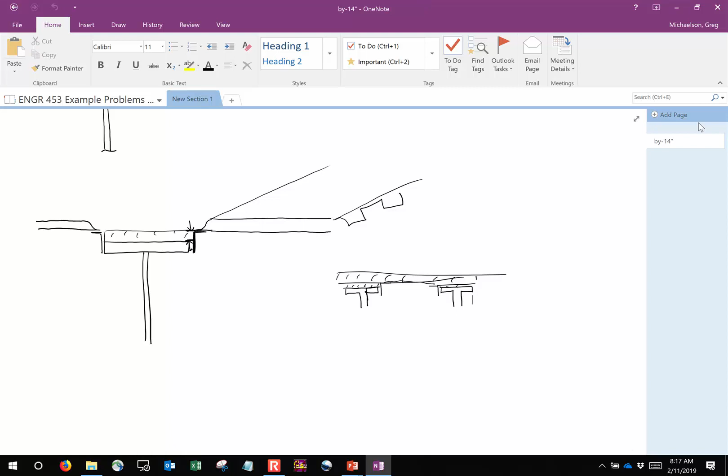Let me show you something. The easiest way to do this is to just draw it, okay? Let's say, for the sake of discussion, actually, let's do this on the page.

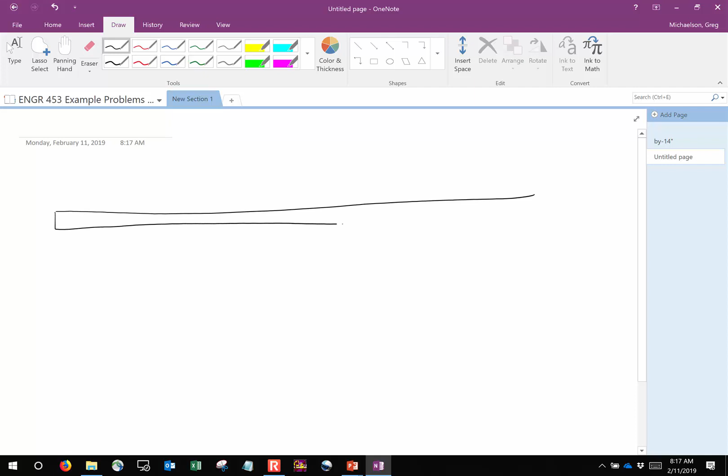Let's say, for the sake of discussion, that I had a two-span bridge, okay? So I've got a bridge that goes like this, and I have an abutment, and I've got a pier right there, okay? Now let's put some numbers on this. Let's say that this span is 100 feet, and this span is 100 feet. I'm going to tell you right now, there is no way that's coming in a single piece.

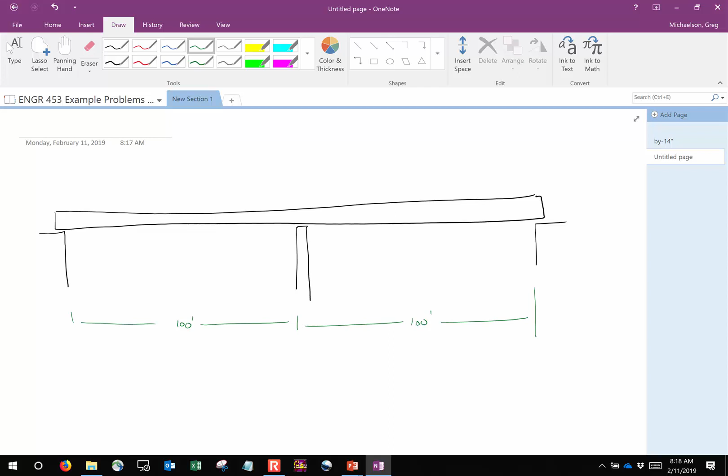No way, okay? So the question is, where do you put a splice? Now, let's say, for the sake of discussion, that I'm going to have 3 pieces. If you were to tell me that you think it's a good idea to put a splice right there, I'm going to ask you to stick your hand out.

That point right there is the absolute worst place ever to put a splice, because at that particular point, you have literally the highest shears and the highest moments. Worst place ever. In fact, in design mode, a lot of attention's got to be placed right there because there's a lot going on, okay?

So the question is, where do you place the splice? I propose that you place the splice about right here and about right here, where this distance is something like 20 feet. About 20 feet. And you're like, where the hell did you come up with that? Are you just making stuff up? No, I'm not making stuff up. Let me show you. Here's why.

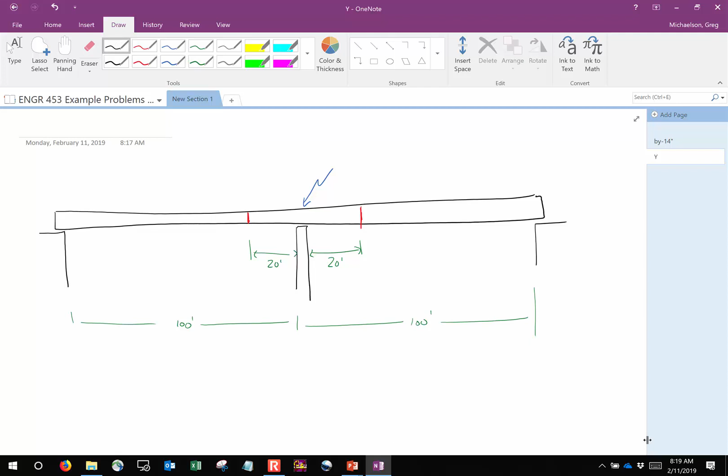Okay, if you look at a beam that's like this, pop quiz: what's the deal? Determinate, indeterminate, what's the deal? Remember? You have 1, 2, 3, 4 reactions, and 3 equations of equilibrium.

Oh, you're looking at me cloudy. See this? This is my heart breaking right here. No, it's not Mortal Kombat or something.

All right, here's the reason why I picked those points. If you look at the moment diagram for a section that looks like that, what happens is you end up getting like a little bit of a smiley face, then a frowny face, then a smiley face. And so where you want to put the splice is right there, where there's no moment, okay?

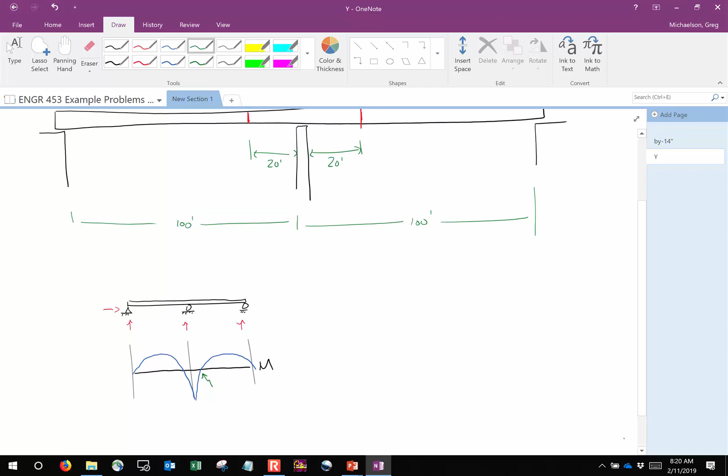Now, are you going to get zero shear there? No, that's not going to happen. If you look at the shear diagram, it looks something like this: it goes up, it goes down, it goes up, it goes down, and it goes back up. So you are going to get some shear there, it's unavoidable. But you're going to get a lot less bending moment. So in this instance, you would put your splice where there's no bending moment, or you do your best to, okay?

All right, in a simply supported bridge, however, that's impossible—you can't do that. Because in a simply supported bridge, here's your moment diagram, it looks like that. There is no instance of zero bending moment, no instance where the bending moment crosses the axis except at the support. So you're not going to put a splice at the support.

That doesn't make any sense, right? So the point is to try and hug it over to one end as closely as possible. Is there like a happy medium, like how you told me an 80-foot piece and a 10-foot piece? Probably not. If you had like a 100-foot bridge, I might go with something like 80 and 20, or 70 and 30. But I would also just try and exploit my shipping requirements as much as possible. So for instance, if I had a maximum shipping limit of 70, then I'd go 70 and 30.

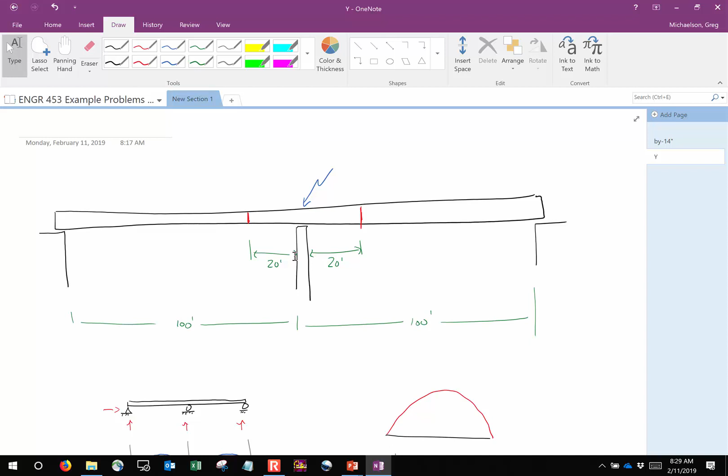Yes, and that's why you have a haunch, because girder A is thicker than girder B, so you need the concrete deck sufficiently raised so that it's flat. So we've been using 2 inches here.

Yeah, in fact, in instances like this, it might not be that uncommon to use something like 3.5. I mean, that just is what it is.

And so the fillet thickness, now the haunch might be the same, but the fillet thickness is going to change along the girder. Remember how when we did the dead load calcs, we said just 14 inches wide and here's the thickness along the entire span. Well, that was fine when the girder's the same, but if the thickness changes, you got to compute a weighted thickness. The fillet is this thick over this region, and this thick over this region, and this thick over this region. So what's the average thickness across the entire span? You got to compute a weighted average.

But that's going to be a really small percentage, right? Oh, you're absolutely right. But not over here when the flange is thicker. But over the splice, yeah, it's going to be really small.

Now keep in mind, we've kind of accounted for the weight of the splice and the bolts because we did that in miscellaneous details. If your splice is freaking huge, maybe go with 7% instead of 5%. Maybe bump that percentage up a bit.

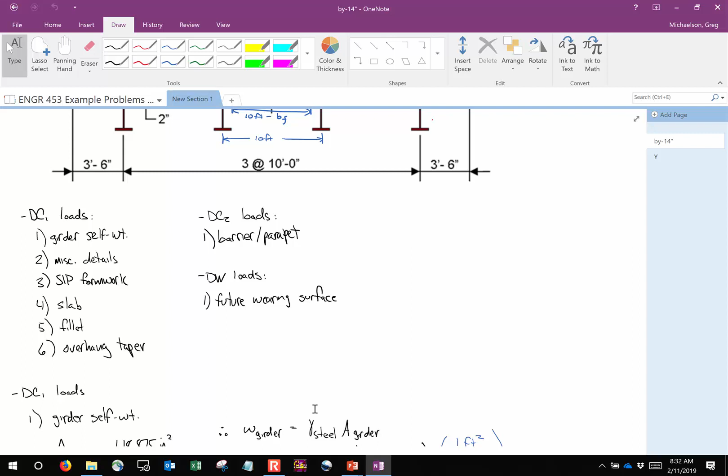So here was our bridge, and we've been taking this one step at a time, trying to break down its dead load computation. First, I want to make sure everybody's clear on this: we had the girder self-weight, the miscellaneous details, the SIP forms, the slab, the fillet, and what we haven't done yet is the deck overhang, the overhang taper. That's the one thing left in DC1. For DC2 loads, we've got the barrier and parapet. And for DW, we have the future wearing surface.

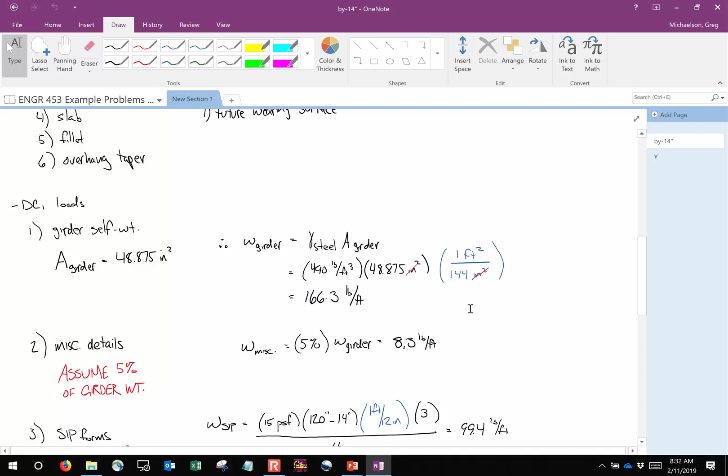So what I've been doing is taking each of these one step at a time. We did the girder, which was just the unit weight times the area - pay attention to units. The miscellaneous details, we just assumed that all the cross frames, bolts, studs, and all that stuff weighed 5% of the girder weight, which is a pretty reasonable assumption.

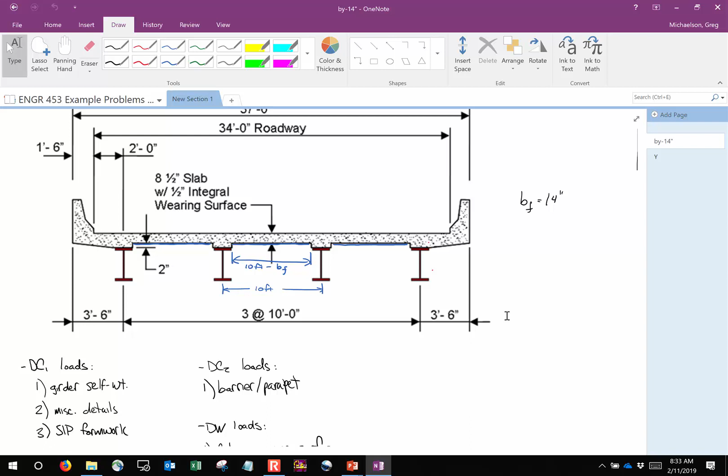The SIP forms, we assumed the forms themselves weighed 15 pounds per square foot, applied over a tributary width. Our tributary width is basically summing up all the lengths - the forms being applied over this blue region, from girder to girder to girder. That length is not 10 feet, it's 10 feet minus the flange width, because we come in a little bit here and there. The top flange width was 14 inches.

So the girder spacing is 10 feet, or 120 inches, so we have 15 pounds per square foot times that width, then we converted it to feet. Now there's 3 widths, but that's all the SIP forms on the entire bridge, so we've got to divide that by 4 because there's 4 girders - the entire SIP form on the structure divided by 4.

As for the slab, the philosophy is kind of the same. The slab is 8.5 inches thick - not 8 inches, 8.5, because we're taking the total thickness. So 8.5, convert that to feet, times 37 feet, times the unit weight of concrete, over 4 girders. So that's 982.8 pounds per foot.

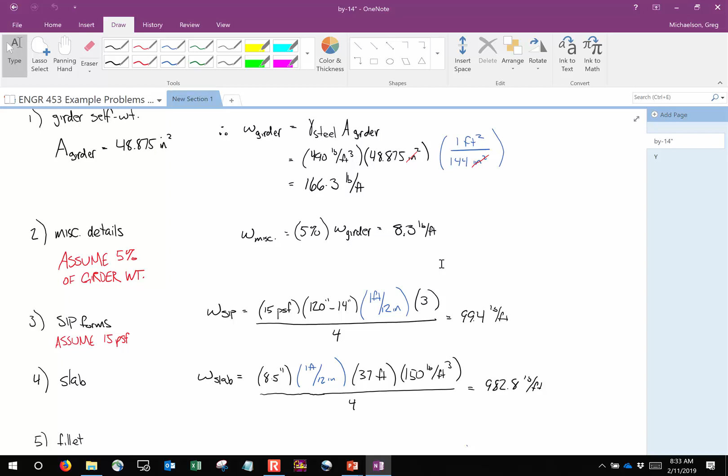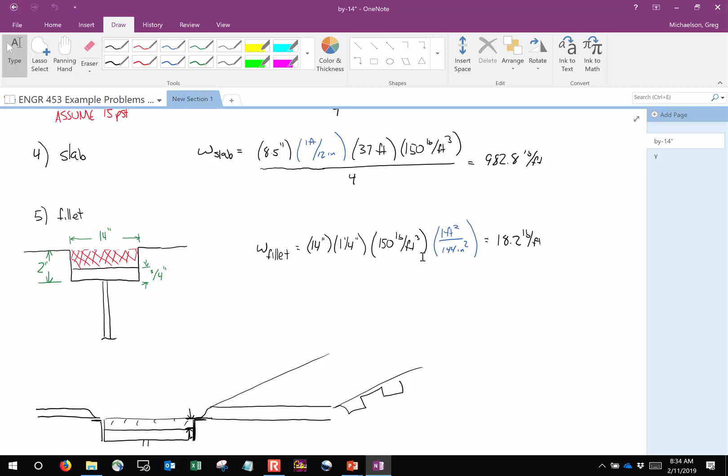Now the fillet, we take the 14 inches times that thickness, which is 1 1/4, because the haunch is 2 and the flange is 3/4 of an inch thick, so we're talking about the difference. So that area of concrete times 150 pounds per cubic foot - we got to do a unit conversion to convert square inches into square feet, so it's divided by 144, and we get that. Everybody okay with this?

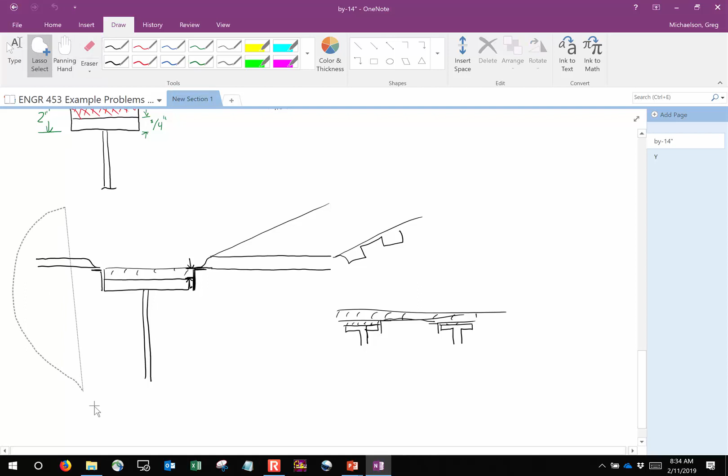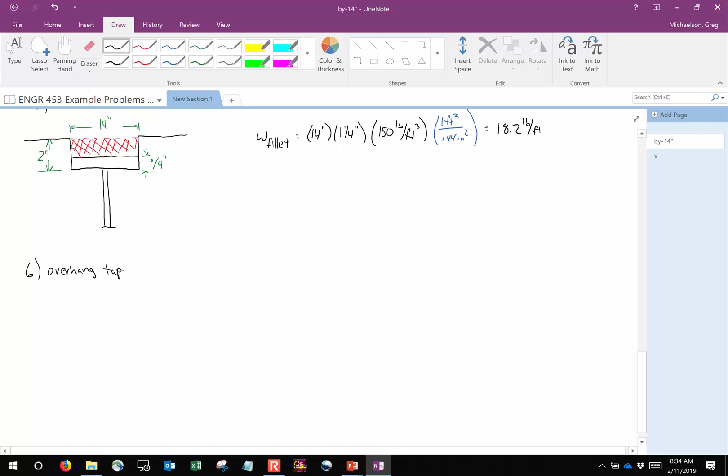All right, if it's okay, I'm going to erase this. Because we have the overhang taper - let me explain how the overhang taper works.

Okay, so here's sort of the edge of the deck, and the barrier sort of comes up there, but we're not worried about the barrier right now. Then we have the deck, it comes down, then we have our flange and our web - that's our girder. You would think this comes down like that, and that's the edge, but that's not correct.

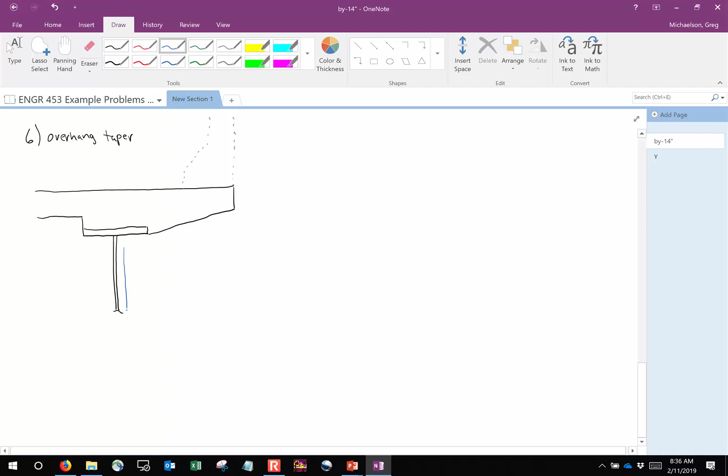Usually what happens at the end, instead of that coming down and cut like that, usually you have sort of a taper. The reason for that taper is because of the presence of overhang brackets. What we've got here is these overhang brackets where they serve as support for the formwork on the overhang. Usually the overhang bracket would lay flush against the girder, then come up like this, and you'd have a strut coming down. So there's a little bit of a taper to the concrete deck.

And so what we've got to do is figure out what's going on with that red shaded area right here. We've got to figure out that way. I'm going to erase this.

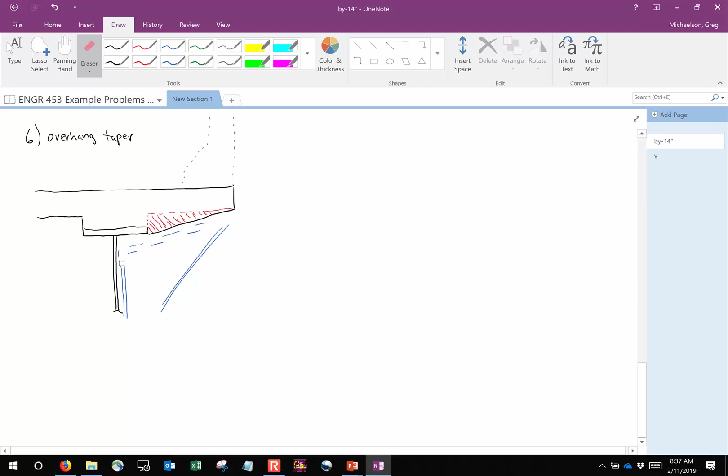Okay, let's see if everybody's paying attention. What is this dimension right here? 3.5 feet, or let's put that in inches.

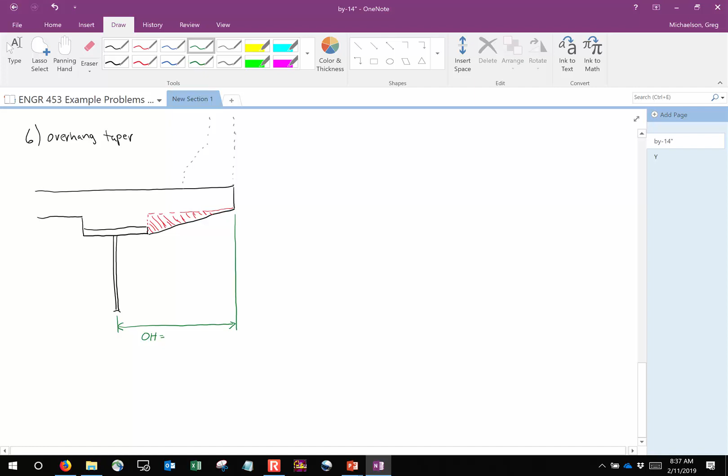So that's the overhang. Now, 3 feet is 36 inches, plus 6 is 42, right? Now, is that how wide the triangle is? No. How much do we have to back off the triangle? It's half the flange thickness, right? So if you want to do this symbolically, this dimension right here is the overhang minus half the flange thickness, right?

Okay, now how tall is that triangle? What's that? It's 2 inches, right? Because that's the haunch.

So if you want the weight of the taper, here's how we're going to do this. We're going to say the area of the taper times the unit weight of concrete times what? Let's do this. How many tapers are on the bridge? There's 2 of them, right? There's 1 on each end. All right, so if I multiplied this by 2, that would be all the tapers on the bridge. Then what do I do to that? Divide by 4. Why am I dividing by 4? Because that's the number of beams or number of girders.

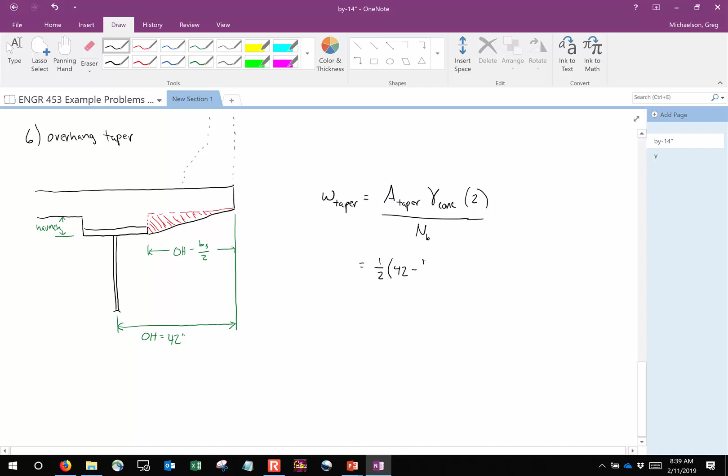So now let's compute the area of the taper. So what's the area of this triangle? It's 1/2 times 42 inches minus 14 inches divided by 2, times 2 inches, right? Now that is square inches, all right? So what I'm going to do is throw a unit conversion into there to say 1 square foot is 144 square inches. So now the area is in square feet.

Fair statement? Okay, now I'm going to multiply that times the unit weight of concrete, 150 pounds per cubic foot. Then I'm going to multiply by 2, divide by 4.

I just don't want you to think that these formulas and these values are just coming out of nowhere, that there's a reason for them. And one of the things while you're crunching numbers, keep in mind, I'm showing you how to compute loads on the bridge in question. Your bridge, your alternative might be completely different. It might not even look anything like this. But the same philosophies still apply.

Now, how do you compute the unit weight of something? It's gamma times the area. That's not the unit weight, the weight per foot. It's gamma times the area. Say it again. Do I have a second on that?

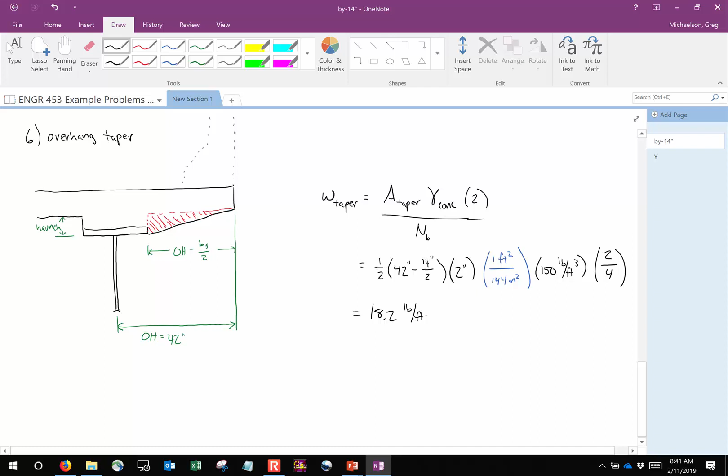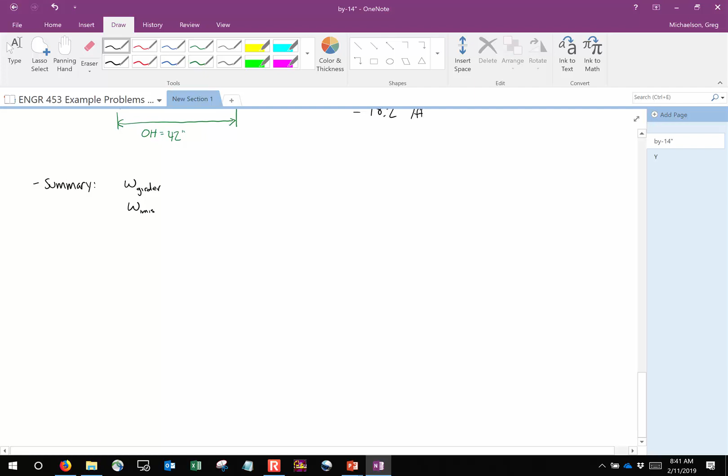Okay, all right, so to summarize, help me out. We had the weight of the girder, the weight of the miscellaneous details, the weight of the SIP, the weight of the slab, the weight of the fillet, and the weight of the taper.

Now I know this one's 18.2. Oh, I don't know what happened there. 18.2. Help me out with the others. What's the weight of the girder? Why do I want to say the next one's 8.3? Man, I'm good. I don't remember, I'm not that good. All right, hold on, 99.4.

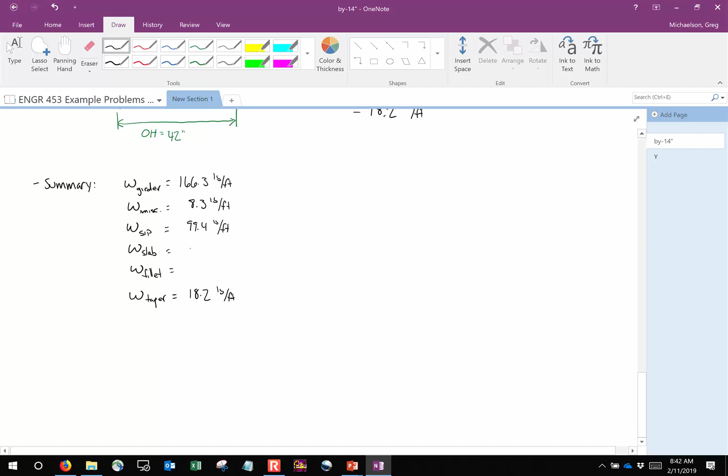Now hold on, let me try something. 982.8. I have no idea how I remembered that. Okay, I don't know the next one. 18.2, I think that's coincidence. Everybody good? So let's sum these up.

I see these engineering students without their Casio FX115 ES Plus. Okay, I know he's an RPN guy. That's fine.

1293.2. Where's your HP 48? So therefore, I propose that the DC1 load is 1.293 kips per foot.

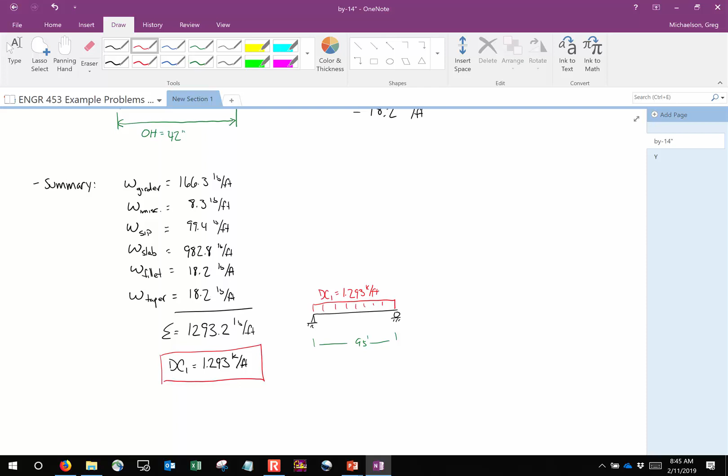We're going to assume a 500-pound per foot parapet. And that's actually pretty reasonable. If you're using a concrete jersey barrier, think about it, concrete weighs 150 pounds per cubic foot. You're talking about a concrete beam that's yay high and about yay wide. So that's a pretty hefty beam.

So, in fact, when you're doing live load distribution studies, you have to eliminate your parapet because your parapet is just another beam that's going to suck in load, right? See? It all comes together. So I propose that DC2 is just 500 pounds per foot times 2/4, or 250. So that's easy.

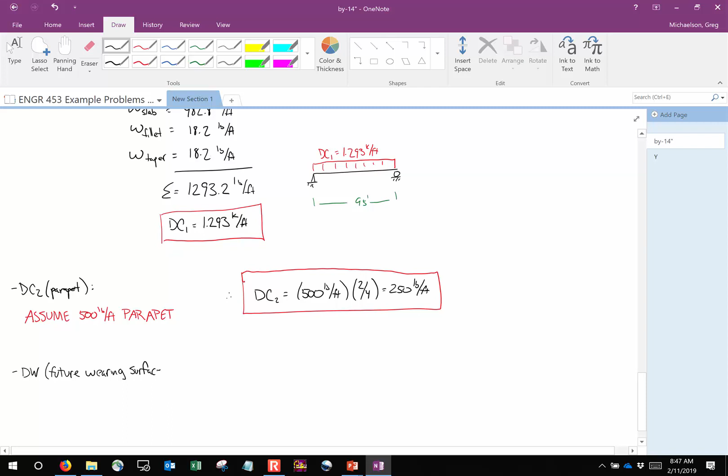As for DW, here's how DW works. DW is the future wearing surface. That's the overlay that we apply over and over again to the bridge over its design life. What happens if you have a bridge and it's been the same for 10, 15 years? After a while, you got to scrape that overlay off and apply a new overlay, right? So over time, that overlay is going to change, it's going to keep getting reapplied. So we need to account for that. That's what, from a load standpoint, we call a future wearing surface.

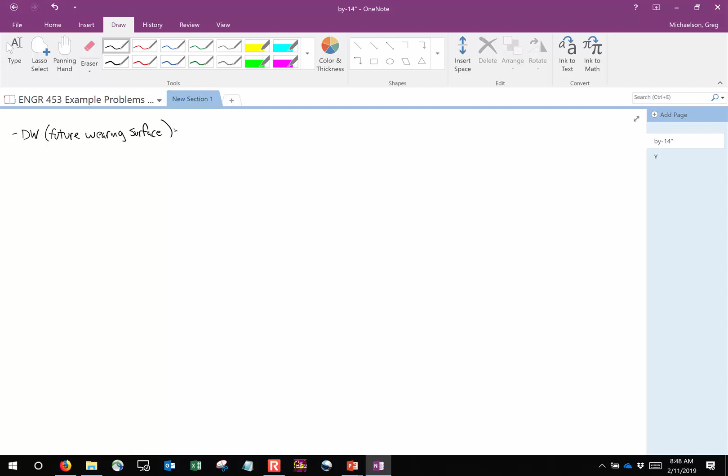Most codes and the West Virginia DOH bridge design manual will tell you a good value to assume. What we're going to do here is assume 25 PSF. So in order to determine DW, this is how this is going to work: we're going to take 25 pounds per square foot, apply it over a width, and we're going to talk about that width here in a second, and we're going to divide by 4.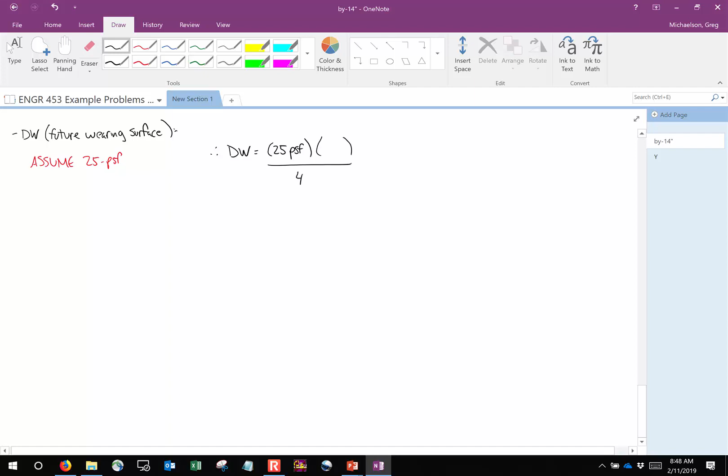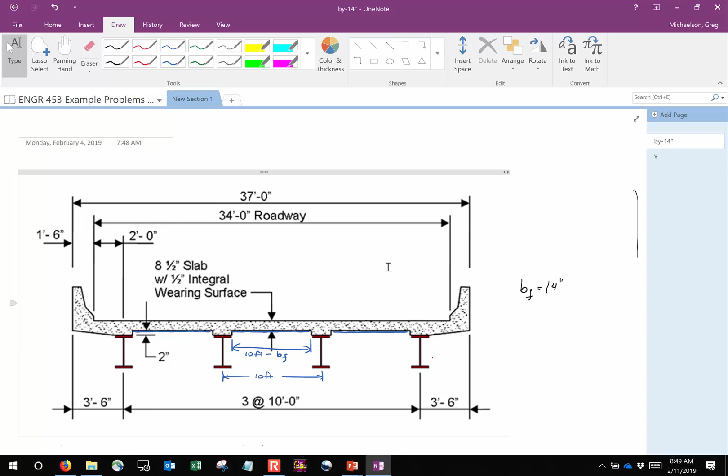Now let me ask you a question. This is the future wearing surface of the road. Over what width do we think this is going to be applied over? 24 feet or? Well, hold on, do they not pave the shoulders? So here's the bridge, what width do you think we apply it over? The 34, not the 37, okay? Think, if you're putting asphalt or some overlay on this bridge, it's going to go from end to end, right? But it's not going to go here because there's a big concrete barrier there. So we're going to apply that over the total width of 34 feet, then we divide by 4.

And so what's that come out to be? 212.5 pounds per foot.

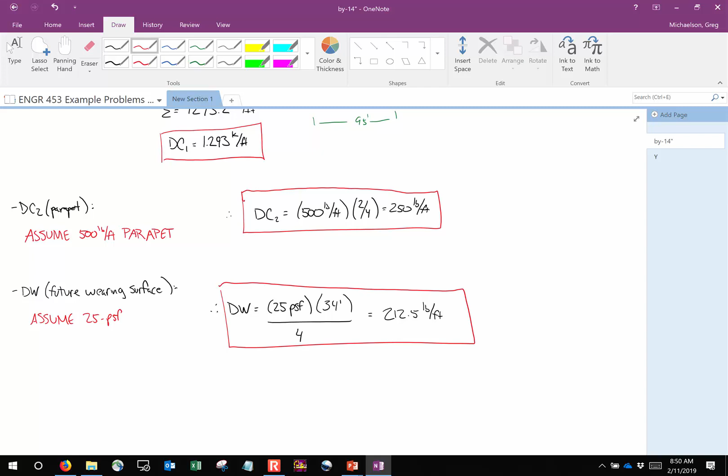And so if you're wondering where the application for each of these numbers are, here's my dead loads. If you put dead load on a beam, you can determine dead load moments, dead load shears. Y'all took structural analysis, so you know how to draw a shear and moment diagram. That's the dead loads. What about the live loads? That takes some discussion, and I'm not going to get into that discussion today, but what I will say is this: it begins with the wonderful world of influence lines.